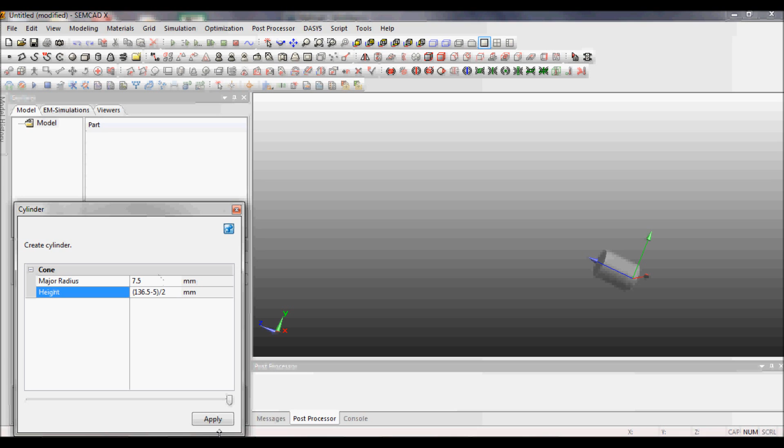But I'm going to have 0.5 centimeter for the feed. So what I'm going to do is take 136.5, that's the entire length, but subtract 5 millimeter. Let's see if we can do this. Divided by 2, because we are going to have 2 conductors instead of 1 conductor. Alright, that works. Now I'm going to apply it.

I'm going to make a clone. Now we have these 2 cylinders overlapping each other. Let's move one of them to the lower place.

By how much? It will be 136.5, actually in millimeter, and I'm going to have a minus 0.5 centimeter, which is 5, and divided by 2. We're going to move that much. There we go.

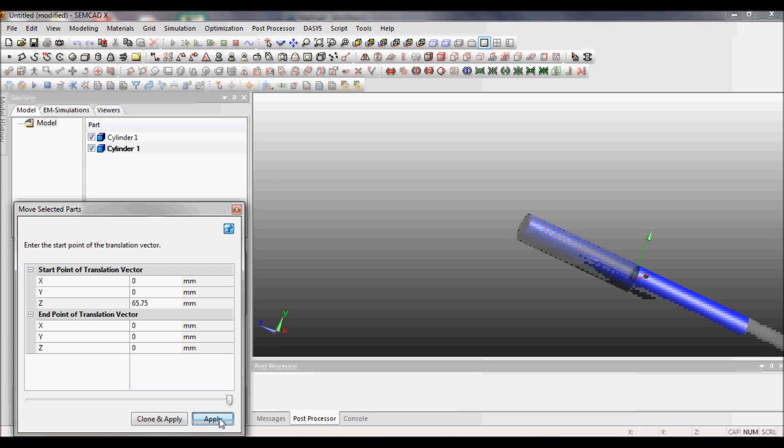Now, as you can see, there are 2 wires, or cylinders in this case, overlapping each other. But remember, we have to have some feed in between. So I'm going to move each of them by 0.25 centimeter.

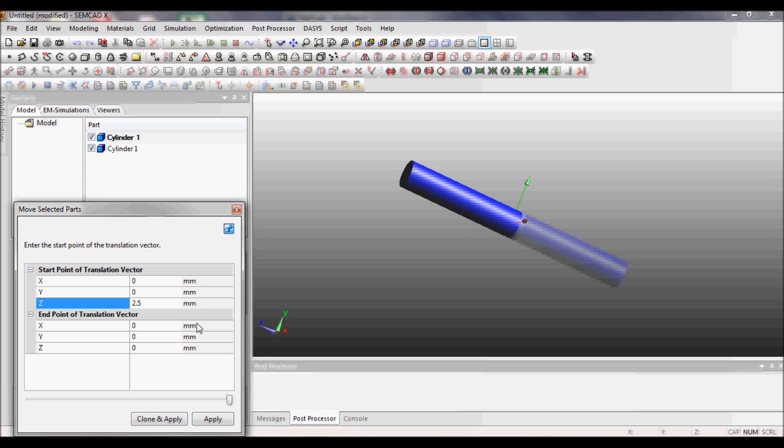Let's go from the first one. Moving 0.25 centimeter, which is 2.5 millimeter. That was wrong, we've got to have minus. Now this is right.

Now for this one, we're going to move down by 0.25 centimeter. And that's it. Now we have 13.65 centimeters from here to there, having a gap of 0.5 centimeter.

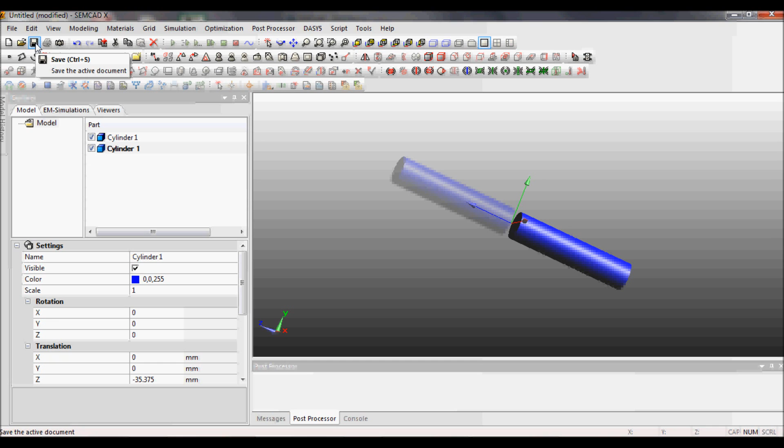So I'm going to save it as thick dipole. Now the next thing we need to do is to put the feed.

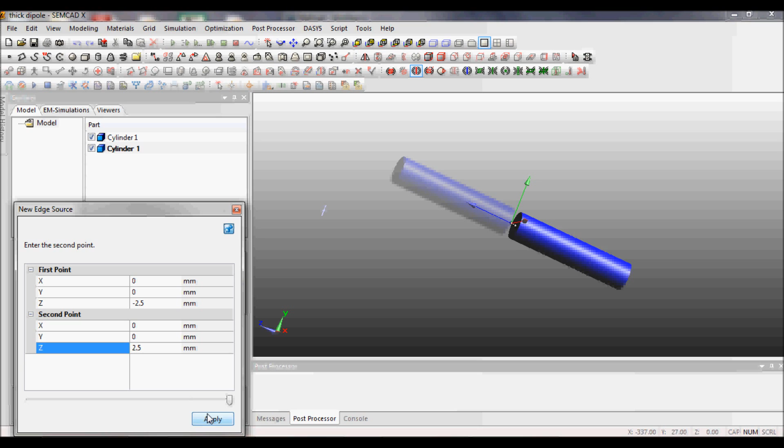So either you can grab the value from here, the point from here, or you can just place it where we're supposed to put it. So x is supposed to be 0, z is minus 2.5 millimeter, again plus 2.5 millimeter. Let's see if we, okay, there we go. So we just have one edge source.

Let me zoom in inside right there. See, we have a nice feed here.

Now the next thing we need to do is go to settings. Instead of harmonic, I'm going to have a broadband. We are going to run a broadband simulation in this case. The bandwidth is just set to 1 gigahertz as default, that's fine.

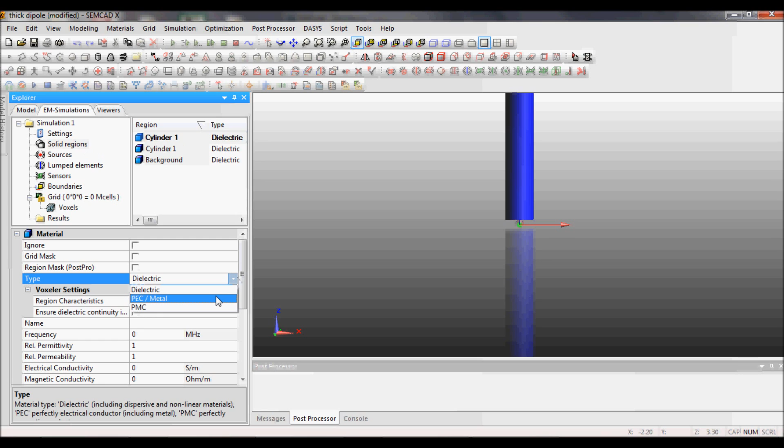Now go to cylinder, solid region, click cylinder, make it PEC, perfect electric conductor. Make another PEC, perfect electric conductor. Save it again, just in case.

Now you've got to make sure that we have enough sine wave. Well, not actually, this is not a sine wave, this is what is called a modified Gaussian pulse. And this is a broadband.

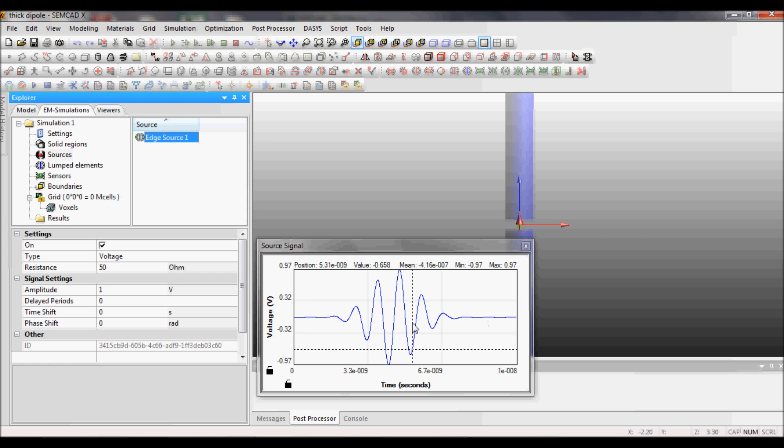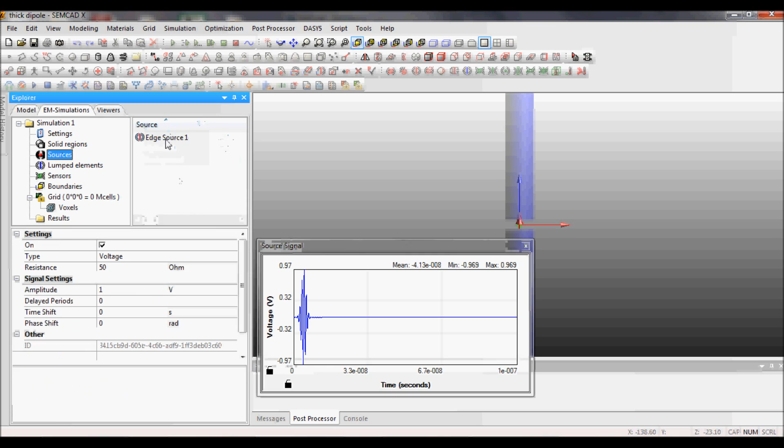So what I'm going to do is, since we have a very short period here, I want to have enough time. So let's go back to settings. Remember, we want to have 100 periods all the time, and make sure the automatic stop function is clicked on. So now there we go, we have a long time, enough time for all the signal to decay.

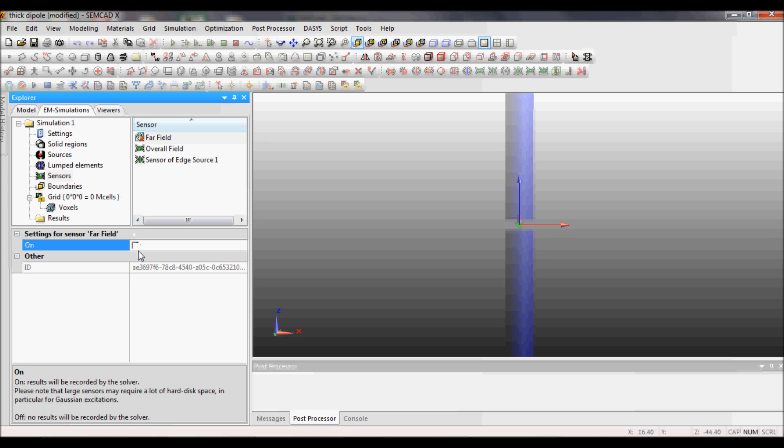Lumped element, nothing. Sensor, nothing. Make sure that we have far field turned on. If you click this one, it's off, and you will see a red cross here. But we want to have far field this time. Boundaries, this looks good.

Now go to grid. This is one thing you've never done. If you look at the mesh here, see there is just 1, 2, 3 lines. If we think about the concept of Lego, we only have 2 Legos here. This is going to be a problem. It will make it really rough. Not the cylinder, but it will make a rectangular antenna.

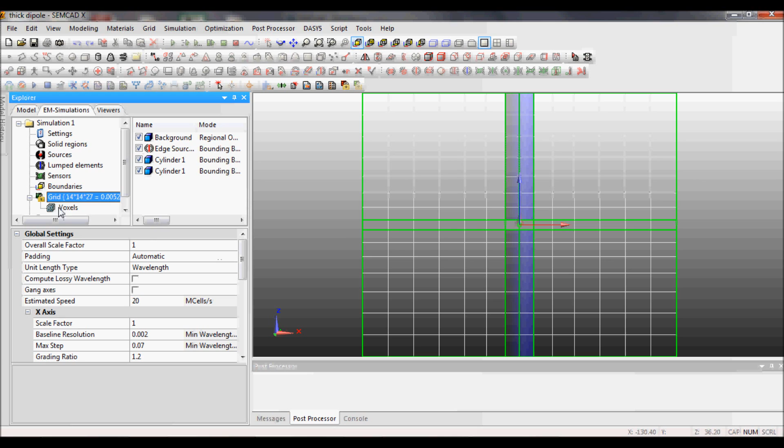So what I want to do is have a little bit more realistic looking. First thing you need to do, go to background and change this wave unit length type into millimeter.

Okay, so this one is better because now all the units you're going to see will be in millimeters instead of the wavelength or electric length.

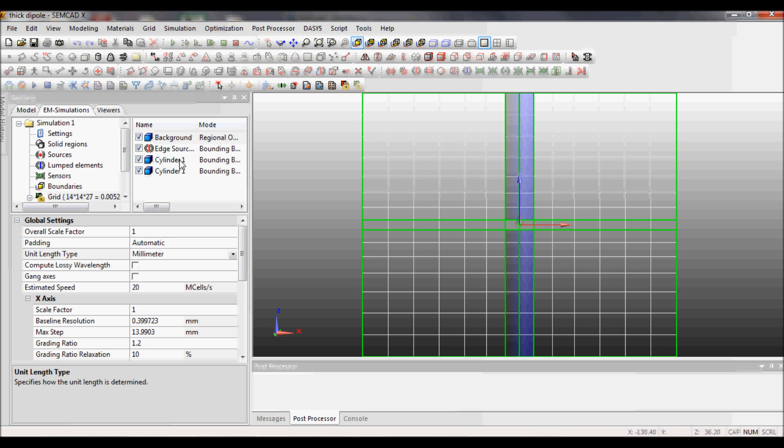Go to cylinder. You just have to do this once here. Click on use local settings. Now what you can do is make some finer mesh.

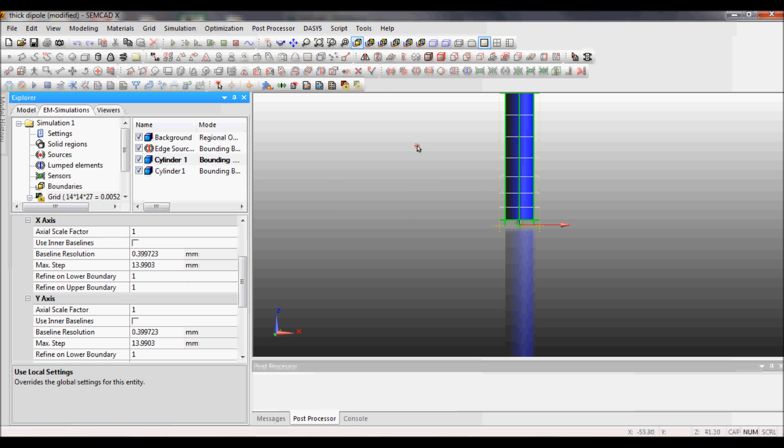I'm going to look at the X and Y axis, which is this axis. See, you only have 4 meshes here. I want to have many more meshes. Again, look at the axis - this is the X and Y plane.

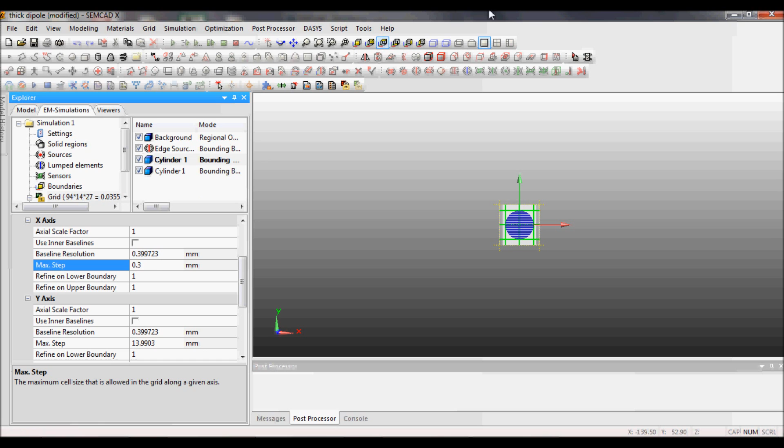Now I'm going to change this X axis by setting max step as 0.3 millimeter. Boom, see, we have so many meshes now. Not so many, but actually we have too many meshes here. I'm going to make it 3 millimeters. That makes a little bit more sense to me.

Now make another one, the y-axis, as 3 millimeter. Okay, now we have 1, 2, 3, 4, 5, 6. This one is not really a perfect circle, but still it represents it a little bit better.

That's what we call a staircase approximation. Let's see how it works.

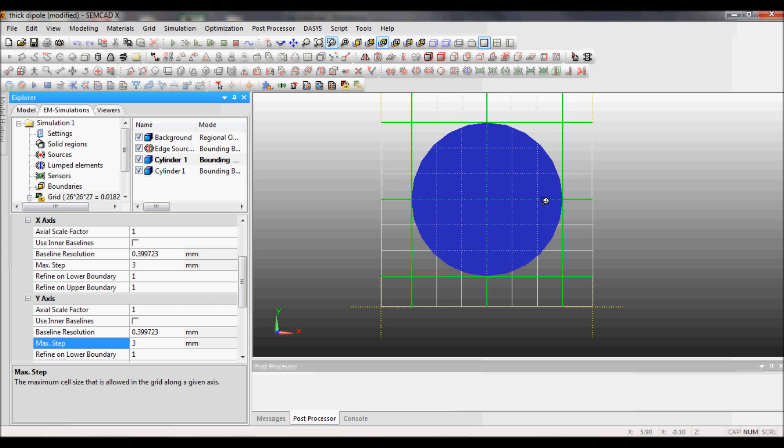Now you just have to mesh it. Right click, voxel, make a voxel. Now I'm going to right click on voxel again and look at how your mesh really looks like. View voxels. Now I'm going to remove this show original model checkbox - if you click this one, what you're seeing is your CAD geometry, not the mesh geometry.

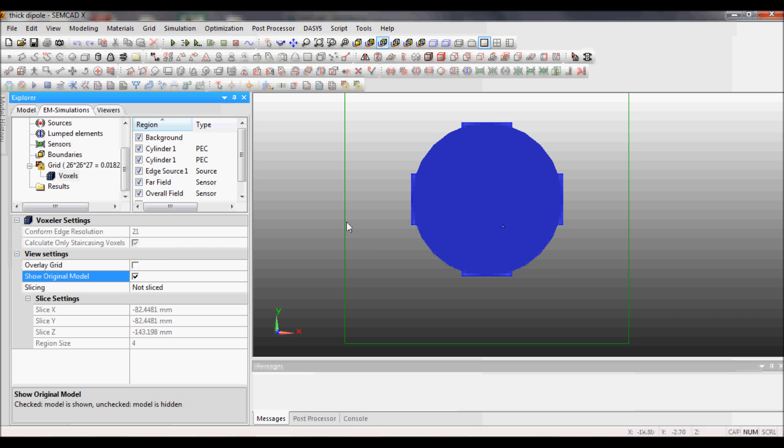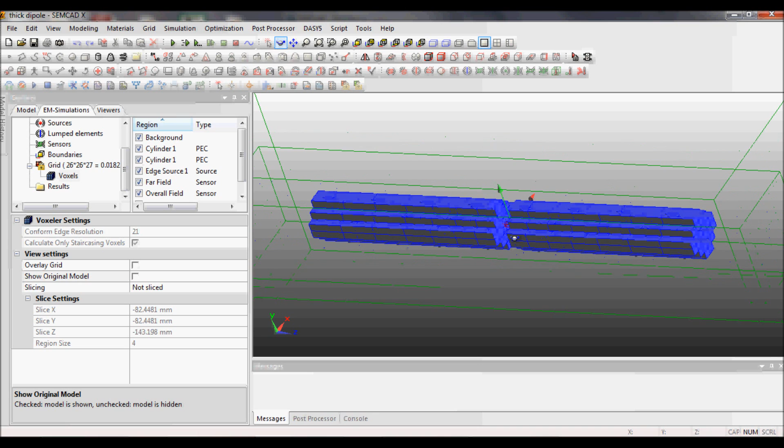So click that and remove that checkbox, and you will see how it is meshed. Again, this is not really a perfect circle, but for our purpose this is just enough. That's your geometry - so if you see some discrepancy or errors visually, you can think that it's because it's not really a perfect circle. That could be one of the excuses, and it's a very well known problem in this kind of simulation tool.

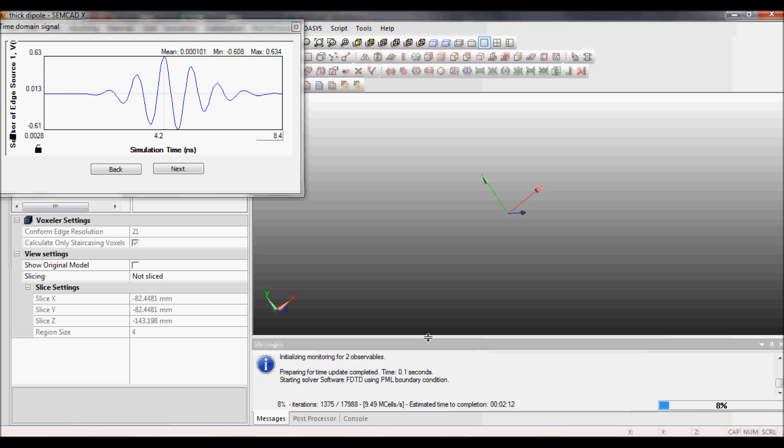Now I'm going to run the simulation. Let's see how much it takes. Okay, it's running really fast, so we're good. Okay, we're done - took me like 15 seconds or something.

Now go to result, go to far field. Oh, the far field is not really calculated. In this case, we have to get the single frequency simulation to get the far field.

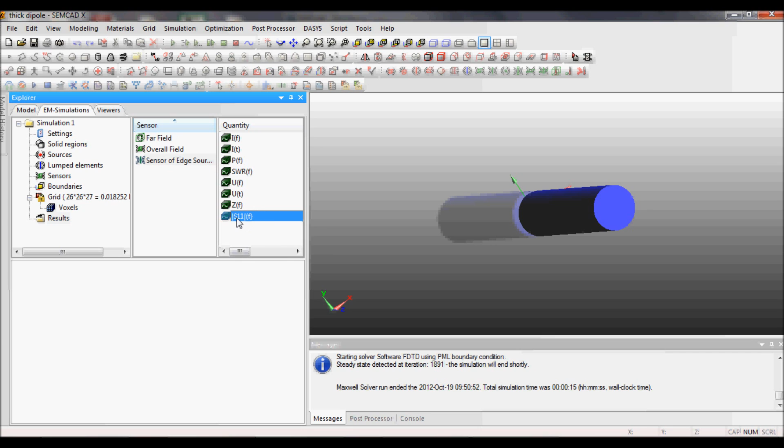Now what I'm going to do is go to sensor of edge source. I want to see how the S11 parameter looks like, which is the reflection coefficient. There we go, see, we have 0.9 instead of 1 gigahertz - there was 100 megahertz difference.

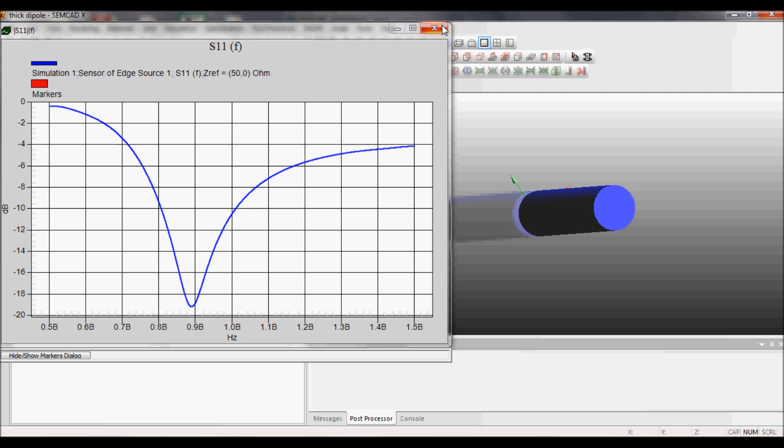That's what it is. It could be because we didn't get 1 gigahertz because the mesh is not really perfect. There could be several reasons why, but 100 megahertz is not too bad. You can just further optimize the geometry to make it perfect.

Okay, so that's that. One more thing that I'm going to do is go to simulation, then go to clone. Now this is the second simulation tool that you got here. What I'm going to do is go to setting.

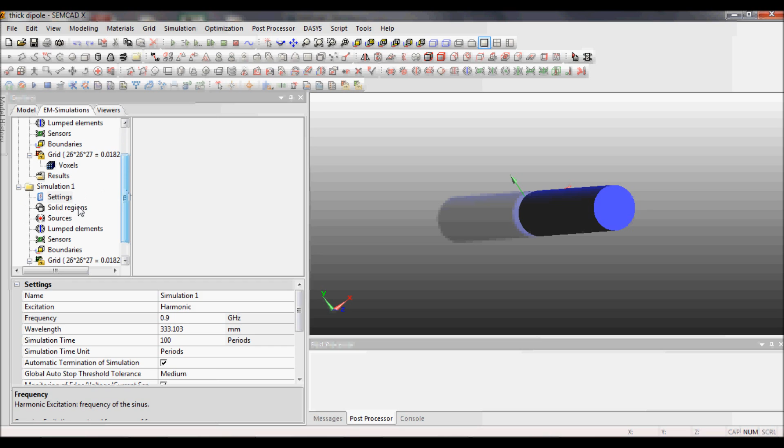Instead of having broadband, I'm going to have a harmonic at 0.9 gigahertz, which had really good S11 parameter. So do the same thing for everywhere.

Source, make sure everything is good. Lumped element, make sure this is now a sine wave instead of Gaussian pulse. And sensor.

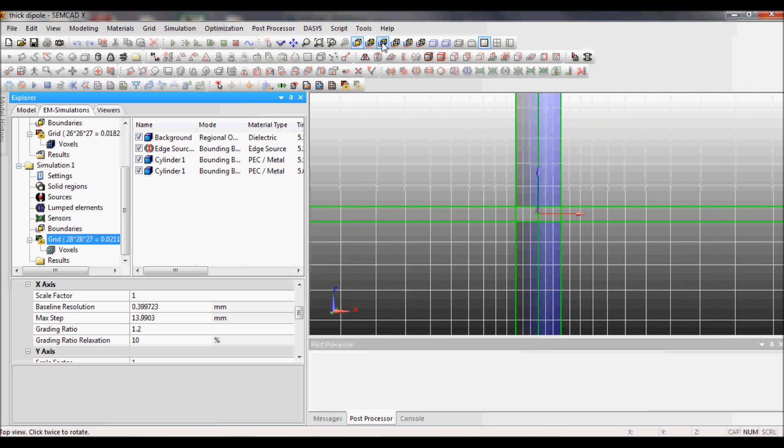Band, grid - you have to click the grid first. I'm going to go over here again. We still have six on this side, six on that side, so we're good.

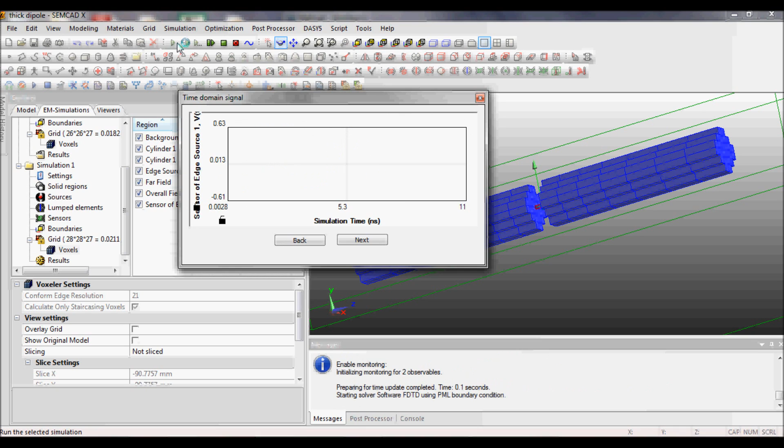Voxel - I'm going to go to view voxels. All right, so that looks okay to me. I'm going to run it again. We're done, that's fast. Now, far field.

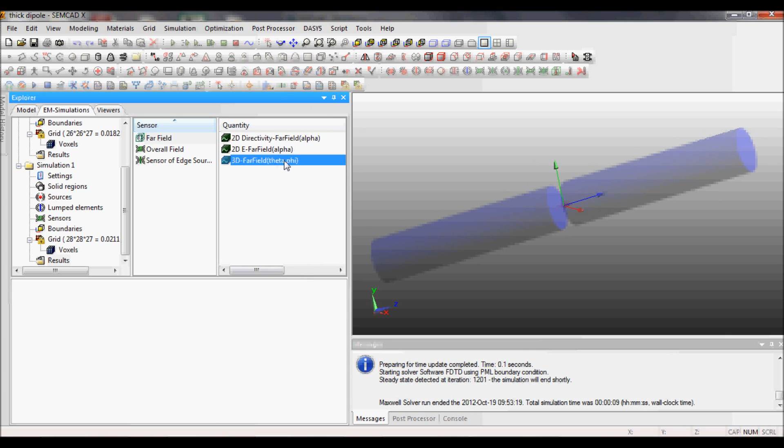There we go, go to click on far field. Click on 3D far field, theta phi. Right click on it.